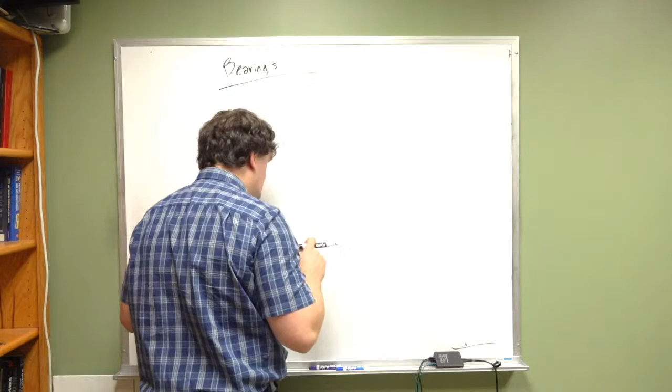Now, when it comes down to things like bearings, in general they are regulated by the American Bearing Manufacturers Association, ABMA. I'm going to make sure that's right before I write it on the board. ABMA. Really helps if I spell it right. Yeah, American Bearing Manufacturers Association.

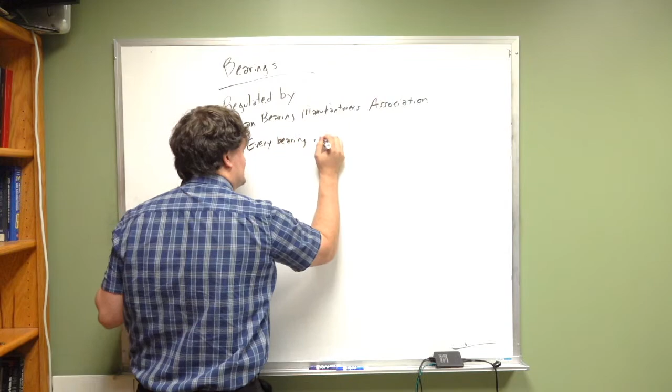Okay, what does it mean to be regulated? Well, this goes into the idea of standards, okay? Every bearing is tested according to standards set forth by the ABMA. The ABMA says you have to do a test using this type of setup, using this loading condition, etc. It standardizes the tests. It's like issuing a standardized test to all students, but here it's just for bearings. And what these tests show is it gives consistent results such that if I buy a bearing from one company, if I go buy it from Grainger, it has a specific load rating on it, I can also go down to McMaster and buy a bearing with the same loading rating, and they will perform very similarly. The Bearing Manufacturers Association, ABMA, is in charge of ensuring the consistency and the quality of these items, okay?

Otherwise, you could say, well, I tested it at 3,000 pounds. Well, how did you test it? Did you make sure that it could handle that? How did you test the viscosity of your bearing? All of these different factors. So every bearing has to be tested, and the standardized testing allows us to compare bearings and get some common knowledge. Otherwise, if you're going to buy a bearing from Grainger, you'd have to use one set of calculations. If you're going to buy a bearing from McMaster, you'd use a different set of calculations. If you're going to build your own bearing, you'd use yet another set. And it just becomes quite a big headache. Instead, because they standardize the testing, we can go look and say, all right, bearing loading rating, we got it for this bearing, we have this set of math that we can use because that math is given to you by the ABMA, which tells us how we can use the information that comes out of the testing. So that's really how it's needed.

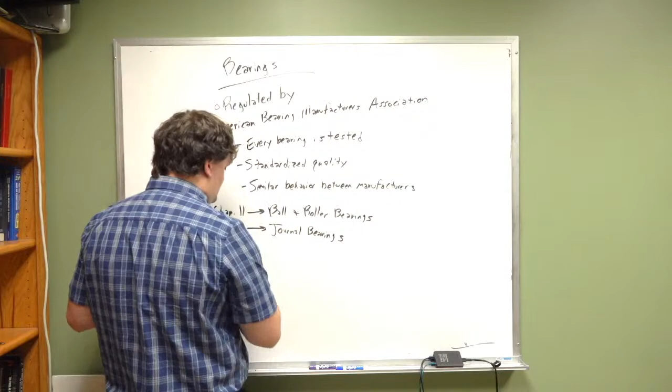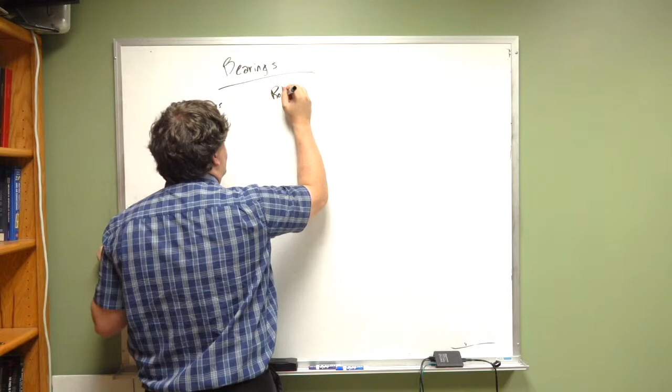All right, so I'm going to go ahead and split this into three: ball bearings, roller bearings, and journal bearings.

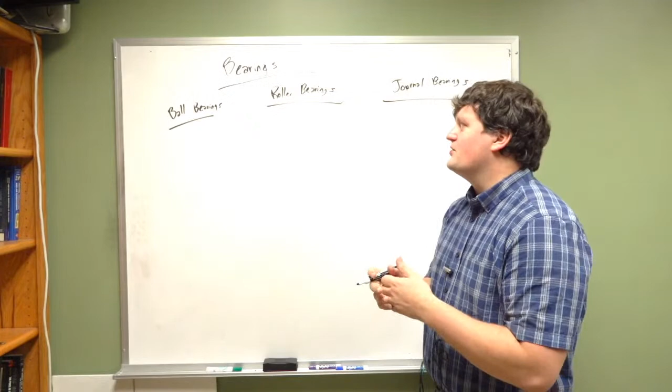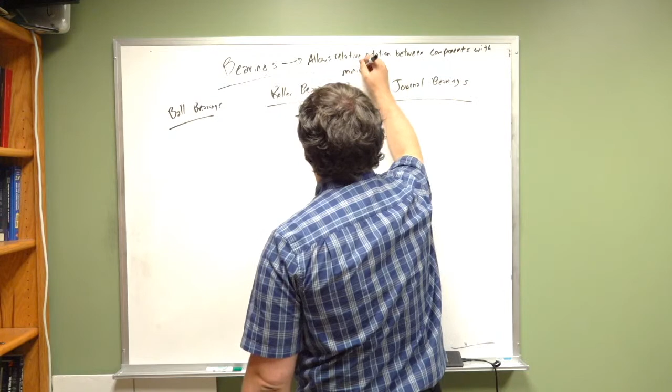For ball bearings, the whole purpose of what a bearing is - if I were to define a bearing - is it allows relative rotation between components with minimal friction. That's the purpose of a bearing, okay?

And in your car, you have bearings that act between the vehicle body and the vehicle axles, because the vehicle axles are spinning and the vehicle body is not. If your vehicle body is spinning and your axle is spinning, you're doing a rollover. Might get to work faster, but you will be hurt.

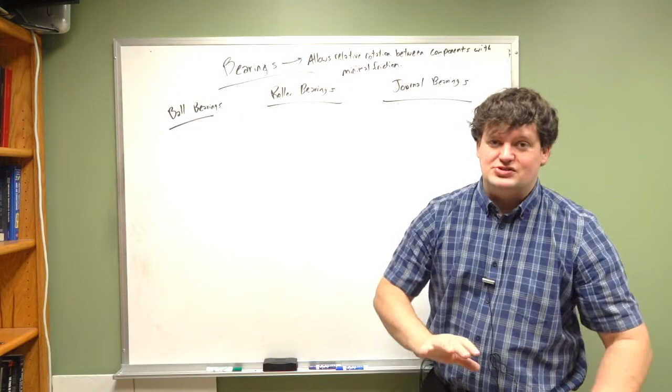So the purpose of bearings is you want a component to move relative to another component. This would be like anytime you have a revolute joint, anytime you have two linkages rotating next to each other. In a 4-bar linkage, oftentimes you will have bearings put into your revolute joints. It's not just a simple dropping a bolt and that's it. Oftentimes there will be bearings involved, especially if there's loading conditions, but we'll talk about that in a bit.

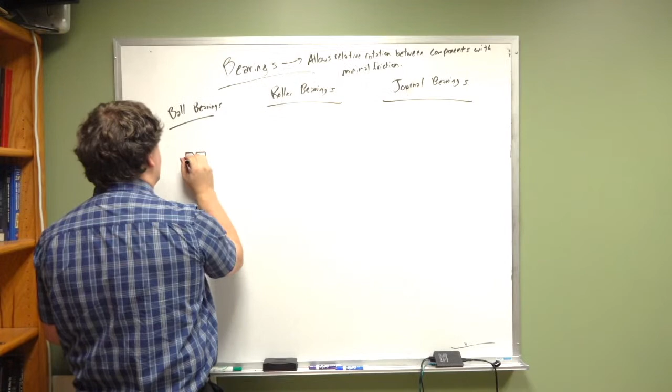Okay, ball bearings - the way they work is you have an inner sleeve that wraps around your shaft, and in that inner sleeve you have a ball, and then you have an outer sleeve, let me try to draw this right, that has a groove, and your ball bearing sits in between them and just rolls. It prevents the ball from falling out because of these two grooves. They're usually lubricated, etc.

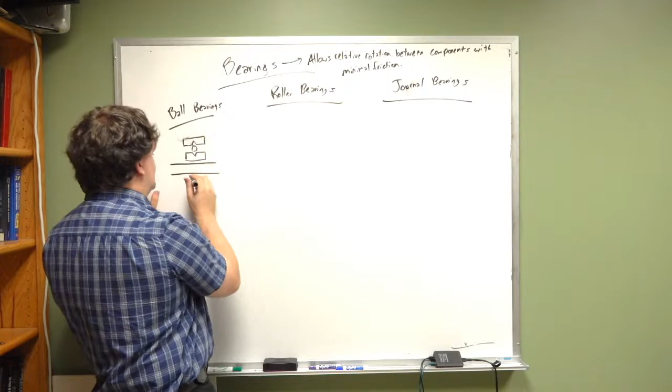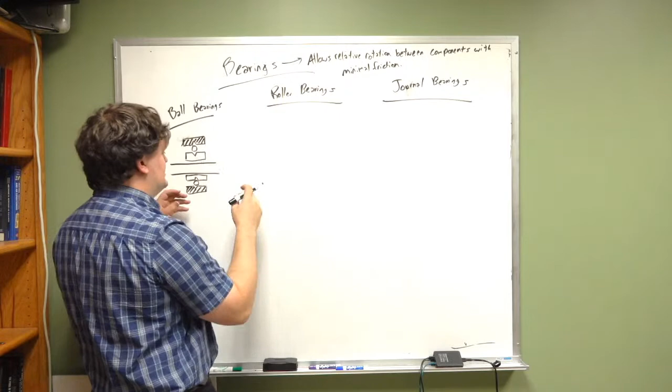And you'll have - this is a cross section - you'll have a similar setup: here's your inside piece, your ball bearing, and your outside piece again. Your outside piece is one continuous circle. Your inside piece is one continuous circle. You stick your shaft into this circle. This piece spins at the same speed as your shaft. This piece spins at the same speed as whatever other object it's mounted to. So like if this was a vehicle, then this would be mounted to the vehicle and this would be mounted to the axle, and as the axle spins...

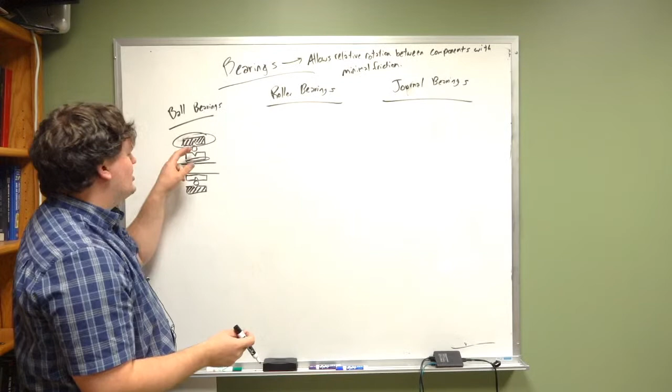Okay, a ball bearing is rotated about half the speed. One revolution of this, you don't end up having anywhere near one full revolution of the ball bearings, just because that's how the ball bearings are rolling inside of there.

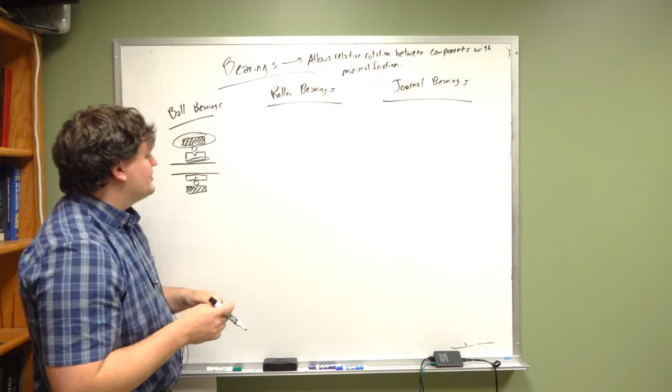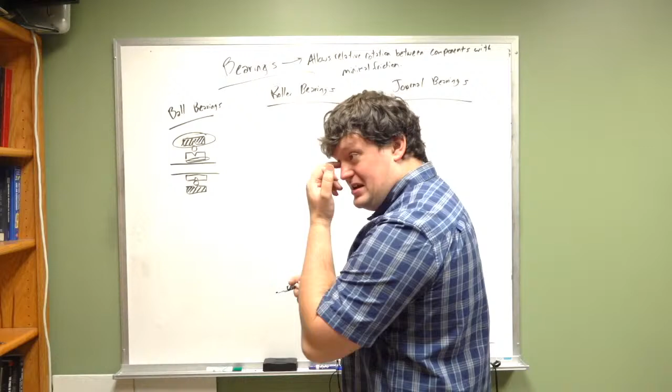Roller bearings are a little different because they're built differently. You can have tapered roller bearings, you can have needle roller bearings. I'm going to show just needle roller bearings here as an example.

So a needle roller bearing, you have a very, very thin roller. It's in some kind of housing like this, and sometimes the needle bearing has some kind of pin that holds it in place, and then the needle will directly contact whatever axle it's on. Sometimes you'll have this rolling relative to another component, a sleeve or something that fits onto the axle.

But in any case, the roller bearings have cylindrical or tapered rollers. They're not balls, but very similar - they have a lot of the same qualities. It'd be like you could use this as a needle bearing. If my hand was some kind of a cup and I had an axle in here that's rotating, this marker would act as a needle bearing because it's just long and thin. It doesn't rotate 360 degrees, it just rolls very nice and smooth.

Okay, journal bearings are a little different. In both of these systems, you have a mechanical component that rotates, and the rotation of that mechanical component really transfers the energy. This rolls because it has a ball bearing that rolls. This rolls because it has a really long, thin roller that rolls.

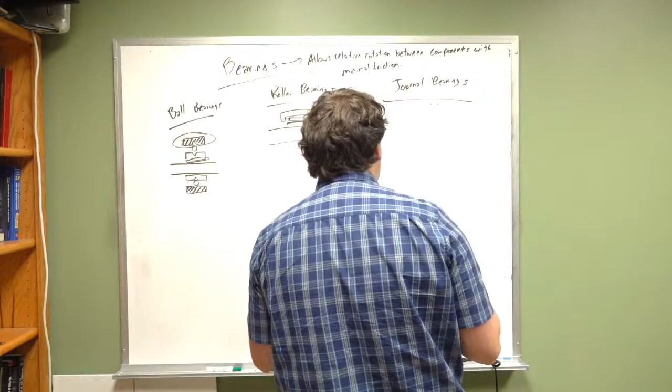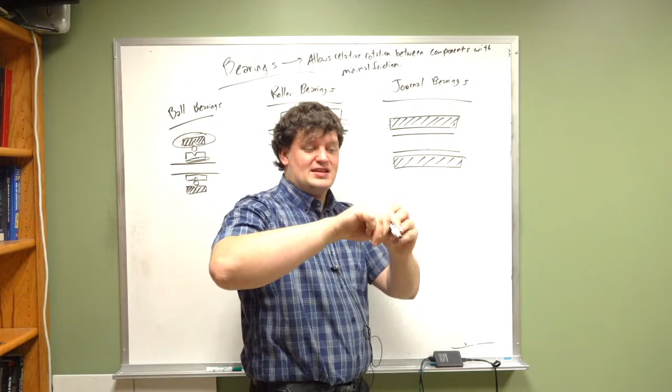In a journal bearing, you don't have any of this. What you have is a bushing. Here's your axle, and your bushing goes all the way around, and your bushing would be directly mounted to whatever component is holding this, like such as the vehicle. In between the bushing and the axle, this axle moves relative to the bushing - it rotates inside of the bushing. So if this was my axle, my hand would be my bushing, it just spins relative.

And what they do is they add in some kind of a lubricant in here, such as oil or grease, something. There's a lot of different kinds of lubricants that can be used in a journal bearing. In a journal bearing, you do not have the rotating parts of a ball bearing or a roller bearing. In a journal bearing, your relative movement occurs through a fluid.

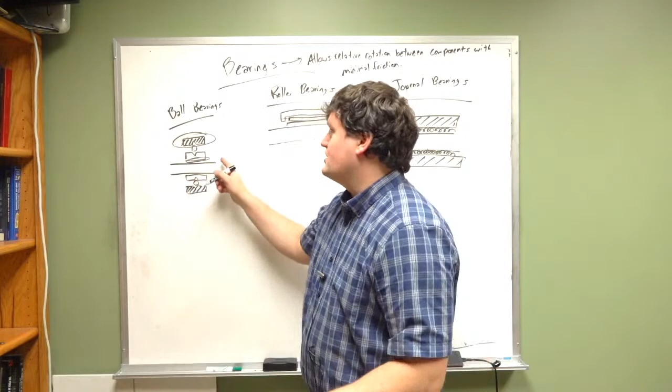And there's a lot of interesting theory behind how they actually move, but this is ultimately it. You have some fluid, and the fluid movement - this is what provides resistance. Here, what provides resistance is the friction between the ball bearing and the other joint, and the friction between the ball bearing and the lubricant that's used. And similarly here, it's the friction between the roller bearing and the joint, and also the friction between the lubricant that's being used. So these are the three different types.

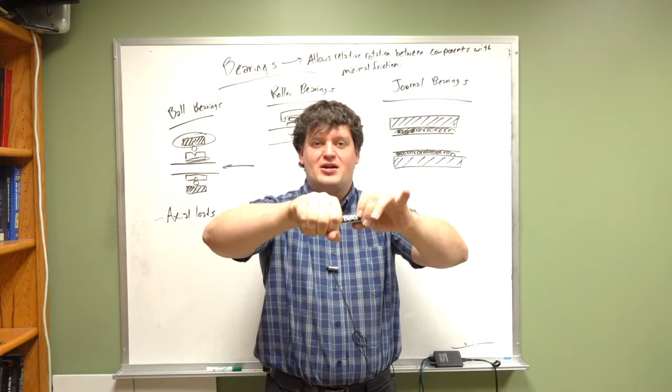Now comparing, the ball bearing can handle axial loads. What is an axial load? Well, it's what happens if I were to take this axle and exert a force in this direction. If this is the axle that's spinning, or my shaft that's spinning, and my hand is the bearing, and I were to push on this axle in this direction, that's called an axial load or a thrust load.

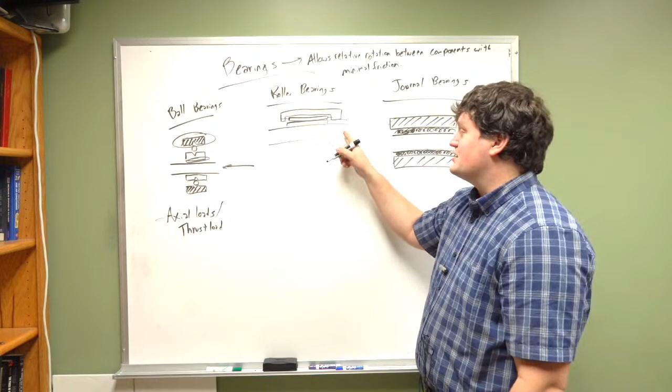Okay, this can handle thrust loads. It can. This can't handle it as well. The thing about thrust loads is that this holds the ball bearing - the ball bearing is held relative, so it can't move. In this one, these don't really hold thrust loading as well. In fact, sometimes you want this to slip in thrust - sometimes that happens. You can design a roller bearing to be able to handle it, but usually those tend to be a lot more expensive. If you're going to be able to handle axial loads, usually you go with a ball bearing.

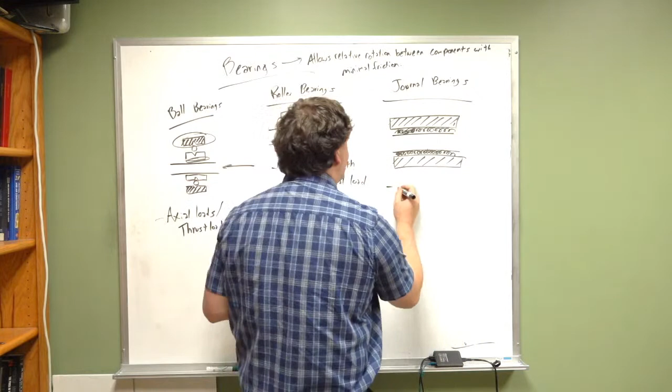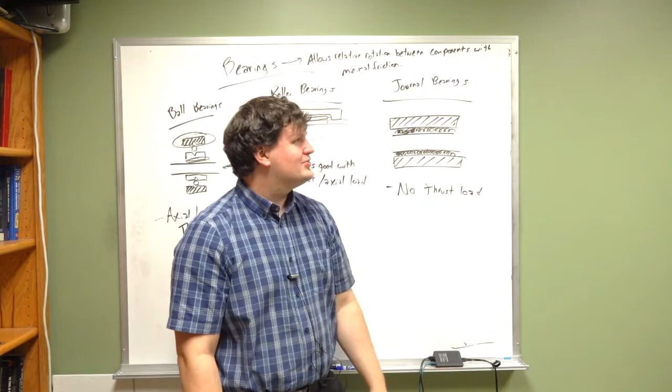Okay, journal bearings can't handle thrust load at all. This fluid doesn't resist - it's not like 'oh no, it's moving quickly, resist,' it doesn't do that. If you're moving this shaft at all, it just slides inside the journal bearing. This can be nice for that reason, because sometimes you don't want there to be axial resistance, which is great. But sometimes you do.

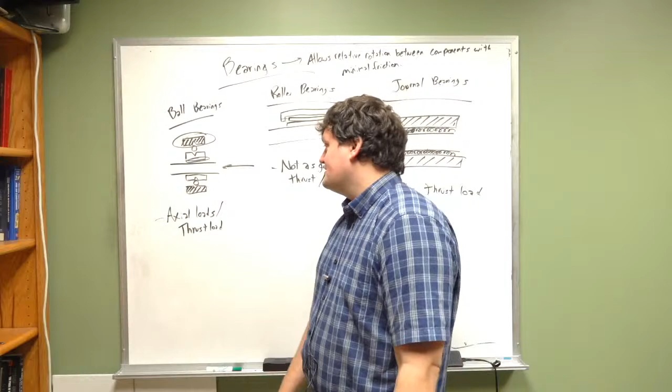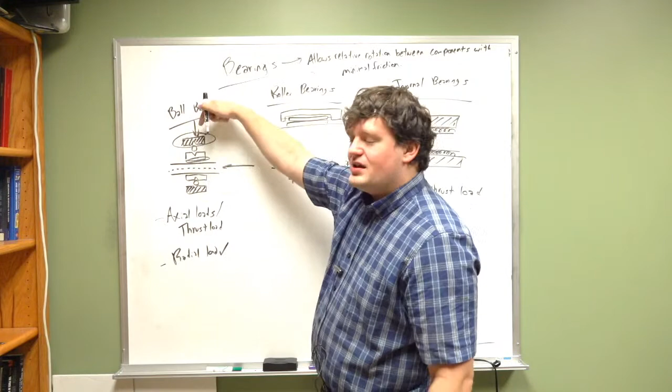Yeah, that's these three. All three of these can handle radial loads. What is a radial load? Well, a radial load is a load in this direction - it's pointed towards the center line of the axis of that shaft. You know, you can imagine that you have a vehicle sitting on an axle - it's exerting a radial load through these bearings, because it's loading vertically relative to these bearings. That's how your vehicle sits on its axles, is through that radial load. All three of these can handle radial loads.

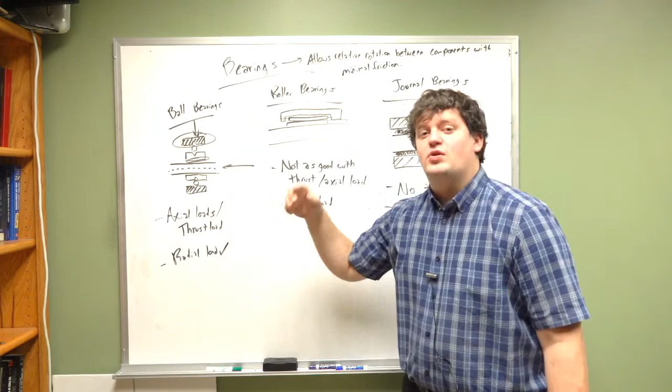In fact, that's really one of the major things about this: bearings do not provide a torque load. The torque that's created is caused by friction inside of these members, where the bearings do heat up, which does happen. But the idea is you want that friction to be minimized, because you don't want any energy losses inside of your bearings. So we treat it as if there is no actual torque created by the bearing, but in reality there is a small amount of torque, and that torque is due to the losses of the ball bearings rolling, the losses of the roller bearings rolling, the losses caused by the fluid heating up in a journal bearing.

Okay, so all of these can handle the radial load, all of them can handle something sitting on it while it spins. Depending on your application, you can design a journal bearing to have the least resistance, the least friction. This is why for a lot of automotive applications where there are a lot of revolutions, they will use journal bearings instead of ball bearings. Ball bearings can heat up a lot.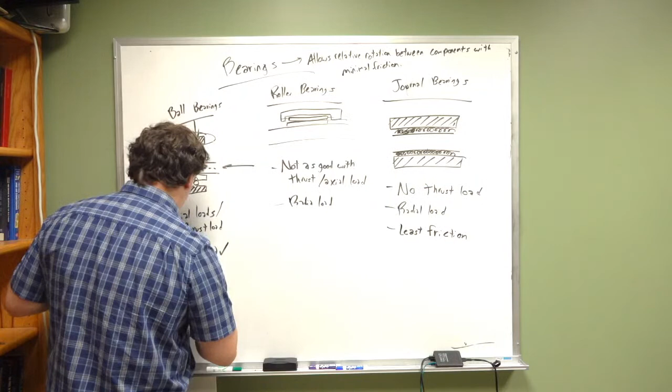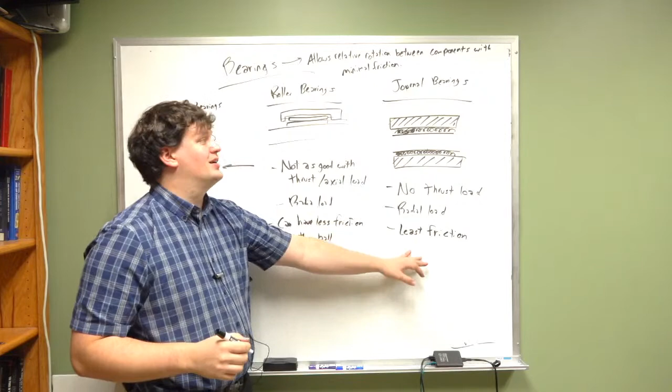Now this isn't a super high friction thing, but it's not something where you're like, oh, ball bearings, gross, it's tons of friction. But the friction here is substantially larger than this. And the same for roller bearings, although roller bearings tend to have less friction than a ball bearing. But it still has more friction than a well-designed journal bearing.

So keep in mind this progression: if you need something that can handle axial loads, you're usually going with ball bearings. If you don't need an axial load or thrust load, and you want to minimize the friction, which usually you want to do, then you go with a journal bearing. These can be designed to be permanently lubricated, okay? And these too.

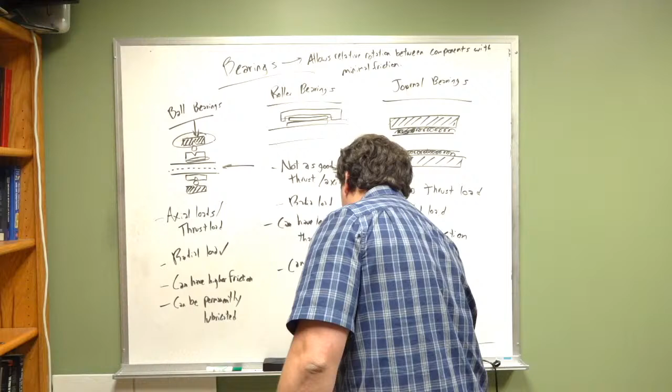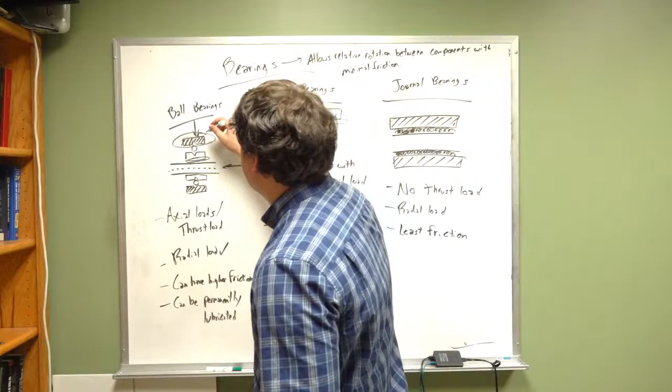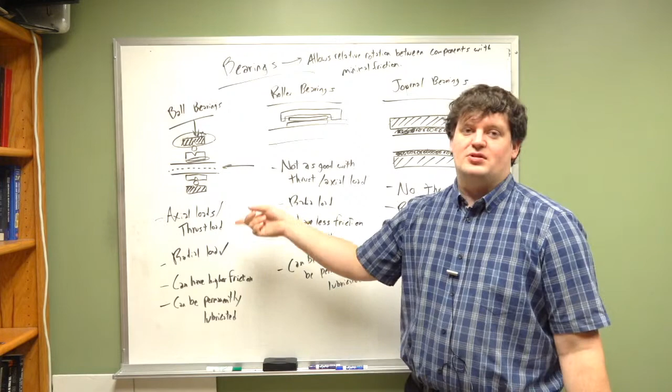Now, sometimes you may see a bearing that has a nipple on it. Yes, that is the scientific word for it. All it is, is a little spout that you plug in to add lubricant to the bearing. If your bearing for some reason is drying out or the friction is increasing, adding a little bit of lubricant through the nipple is good for it. Similarly, you may have nipples on roller bearings, and you may also have nipples on journal bearings, which is not something you probably expected to hear when you signed up for class. We'd be talking about nipples on bearings, but that's what it is. That's how you put more lubrication into the bearing.

Usually you can tell whether or not it's going to need more lubrication based on the amount of friction that's provided. Now, most journal bearings will require additional lubrication. It's just the nature of it, you have sliding components, etc. Well-designed journal bearings in systems where you do not have a whole lot of axial motion sometimes will not require any lubrication at all. That's why you don't really go in and have to lube up your wheel axles, even though there are journal bearings in there. They're well-designed bearings, but in most applications, anytime you have a journal bearing, you usually have to do it.

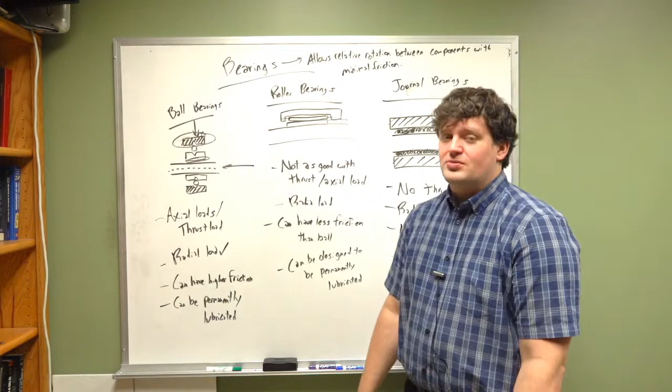There are some ball bearings that are fully shielded. Shielded prevents dust from getting in, but also prevents the lubrication from getting out. Those can be permanently lubricated, no problem, last forever. You can do the same thing with roller bearings too. So if it's an issue where you absolutely do not have the ability to go in and lubricate that, that's another case for ball bearings. Although again, you can get journal bearings where you don't have to provide additional lubrication. And a lot of times the way that you apply additional lubrication is through actually having some kind of a nipple on the outside of your bearing.

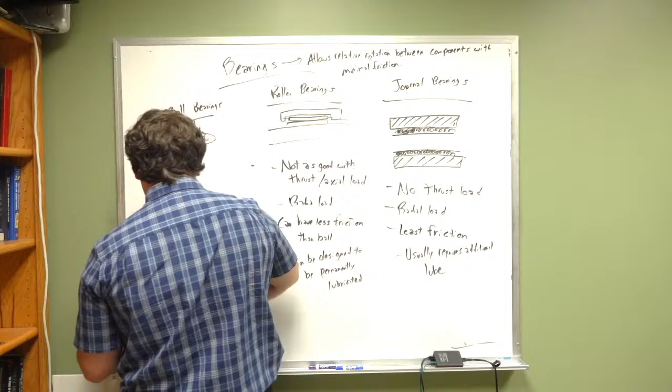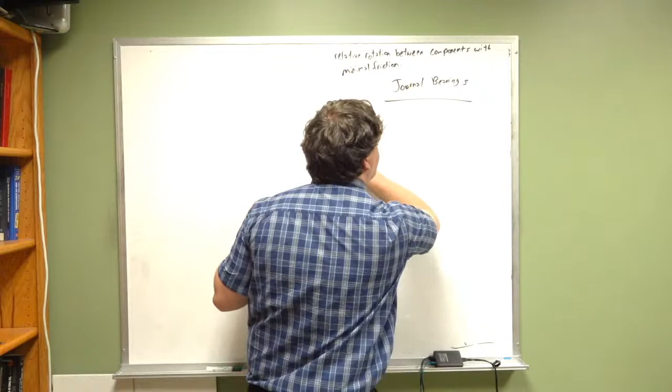That's the difference between these three different types. Now we're going to very briefly discuss what it means, if you have a bearing and you have some loading on it, how do you design that bearing? With ball bearings, what you end up with is all ball bearings have a reliability rating given to them that's called the L10. Okay, so ball and roller bearings.

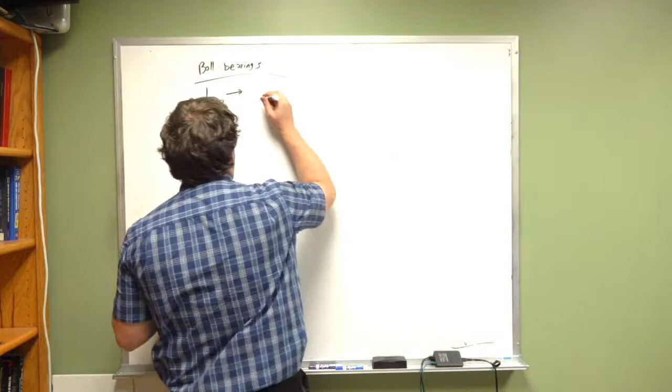What the L10 rating is for a bearing is the 90% reliability for a certain speed, for a certain amount of rotations. So how much load would mean that 90% of the bearings would survive at that loading for that number of rotations. It's really hard to guarantee 100% of the bearings will always survive, because you never know when

you're gonna have a ball bearing that just goes whack. They're very limited, but it does happen. Ball bearings can have small deformities in them with increased fatigue loading caused by the rolling motions. It can cause the ball bearing to crack in half. As soon as that happens, it fractures and fragments pieces of ball bearing all through the lubricant throughout the ball bearing joint, and it just mucks everything up, and eventually the bearing is just shot.

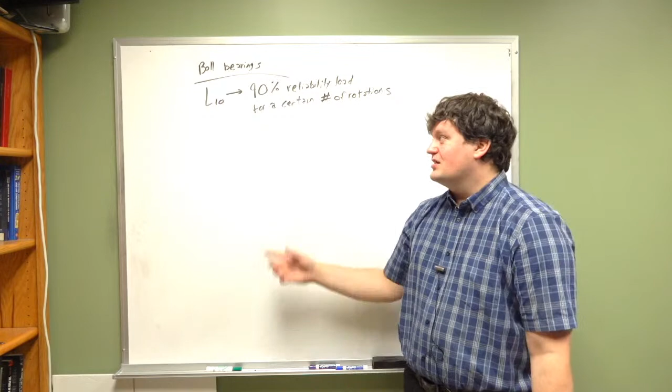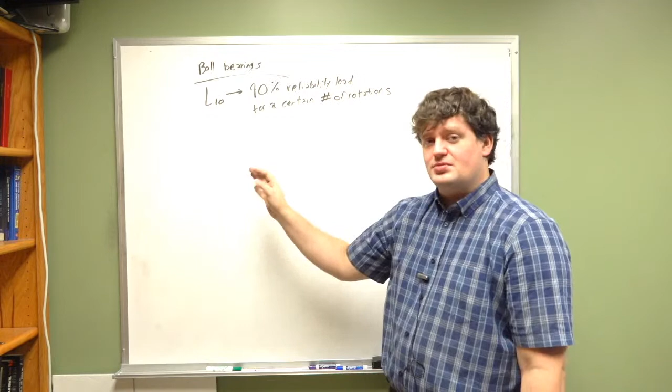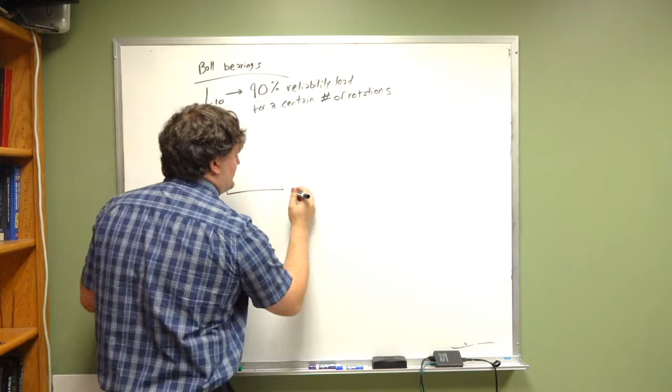So 10% of the bearings will experience some failure like that, but 90% of them will be fine at this loading for this number of rotations. And you'll end up with an L10 curve where your L10 value for your load versus your number of cycles ends up going something like this. At lower cycles it can handle higher loads. At higher cycles it can't handle as much load, and this is the case.

Now if you wanted an L05, which would be a 5% failure rate, which most manufacturers don't give, that does tend to be lower, because you can't expect as much out of 95% of the population of bearings. Similarly, if you're going for an L50, where 50% of them fail, then it's much higher. No, that doesn't tell you a whole lot, unfortunately.

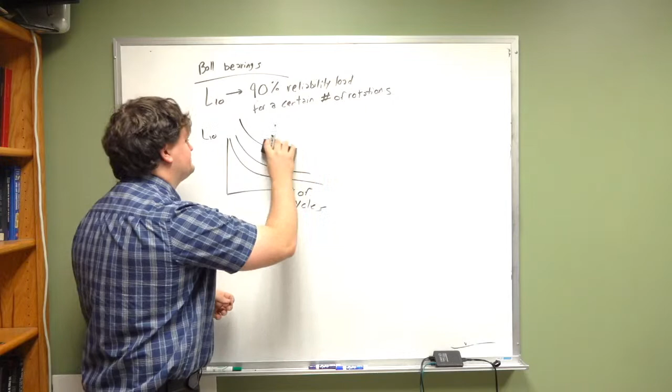So oftentimes what is used is we do focus on this L10 rating. There are methods in the book for calculating it at different reliabilities. That is a little bit in your reading assignment. You can read through that in your spare time. We're not going to talk about it in this class because I want to focus on the fundamentals here.

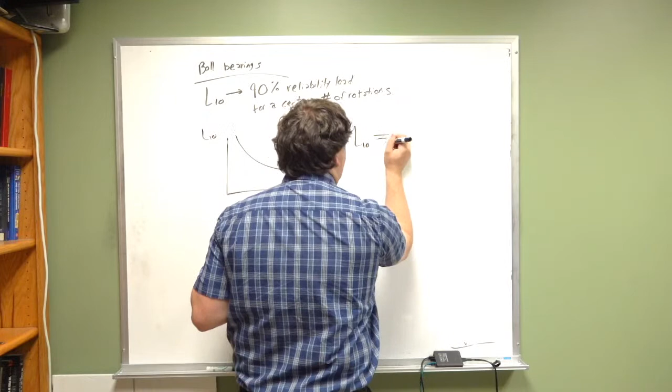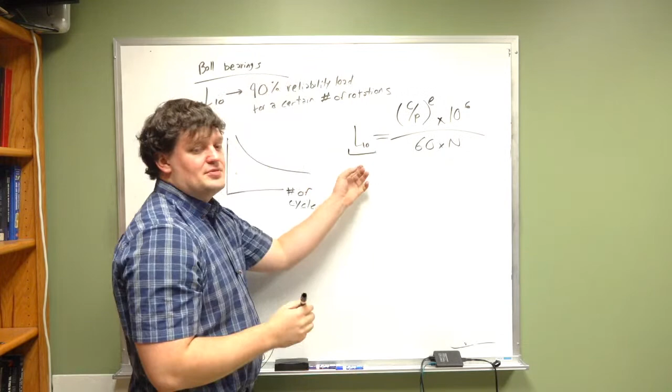The way that L10 is calculated is C over P to the E, times 10 to the 6th, divided by 60 times N. Now what do all these variables mean? Well, this is your L10 life, the 90% reliability load rating. C is your dynamic capacity, probably in pounds. P is your equivalent bearing load,

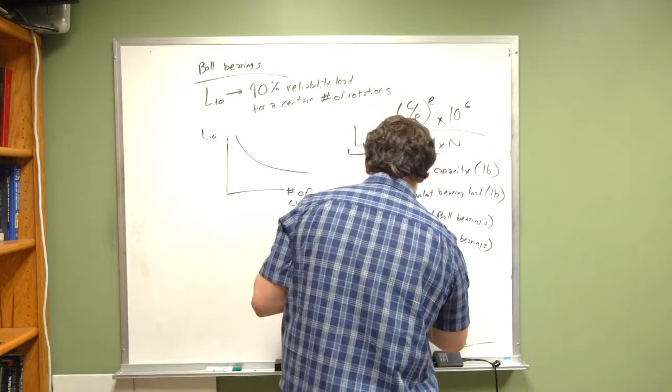also in pounds. E, this is for ball bearings, it's 3.0 for ball bearings. And this is 10/3 for roller bearings. And then we have N, which is the rotation speed.

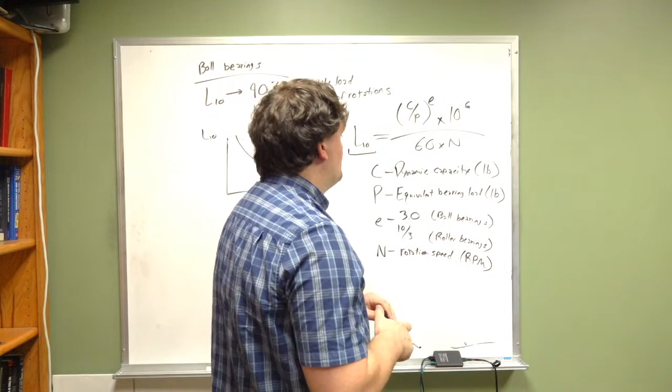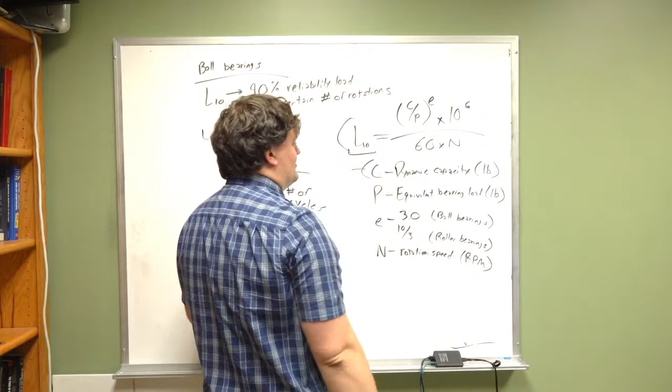And this is in RPM, usually. So being able to do this, what we figure out is you can use this value. Basically, if you have an L10 rating for a component and you want to change what the equivalent bearing load is on that bearing, you change the P value with a given L10 value for that bearing. It'll tell you how much load it can actually handle. Usually you're altering this and this simultaneously. This is your value that you change to get here. So that's really what you're looking at.

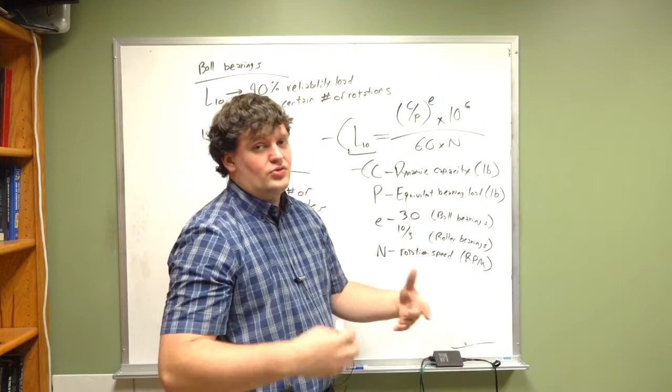And you do have to pick, okay, how long do you want your bearings to survive if it's a ball bearing? If you want it to go through 10 million cycles, your N is going to have some life of 10 million cycles at some certain speed. Are you looking at a nominal speed of, if you're going down the roadway, is it 30 rotations per minute, or are you looking at 120 rotations per minute? What is that speed that you're dealing with?

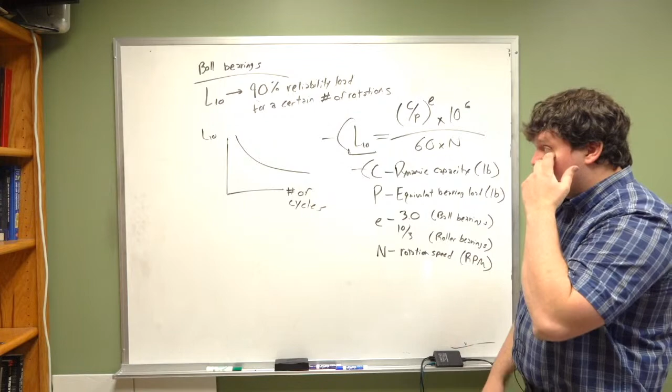So this is one way to do it. There are a couple examples of how to do this in the book. The book uses a different formula. You can follow the examples in the book. But what I'm going to do now is I'm going to go ahead and talk about how to select a

bearing for an application. I am going to focus a little bit more on ball bearings. I guess I could do another example with journal bearings later this week. I'll consider that because I think journal bearings are important and really useful. Journal bearings are very common. Just because ball bearings have so much information about them doesn't mean journal bearings aren't significantly useful also. But so I will be posting a video. My next video will be on selection of a ball bearing joint, and we'll move from there.